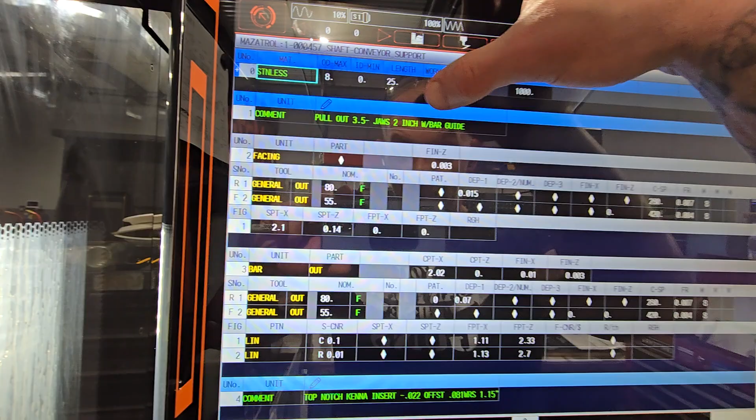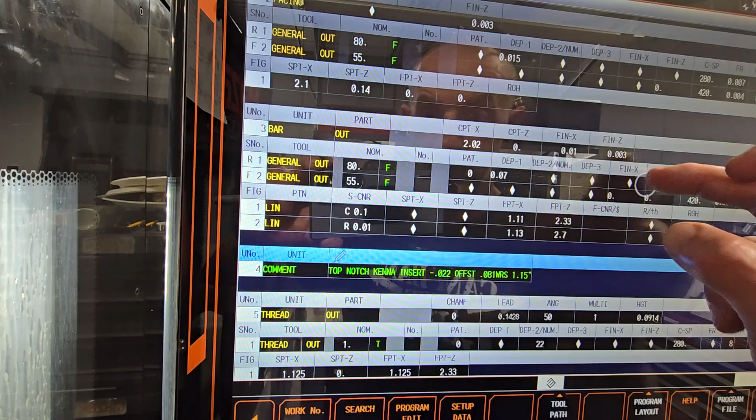So as with notes, pull out 3.5 inches from jaws, 2 inch with the bar guide inside. My tools are 80 and 55 respectively. So over here I'm starting 2 inches, 100,000, removing 140,000 from a face. I'm coming down to 0 and my Z is 0. OD turning, so the OD turning I'm only doing...

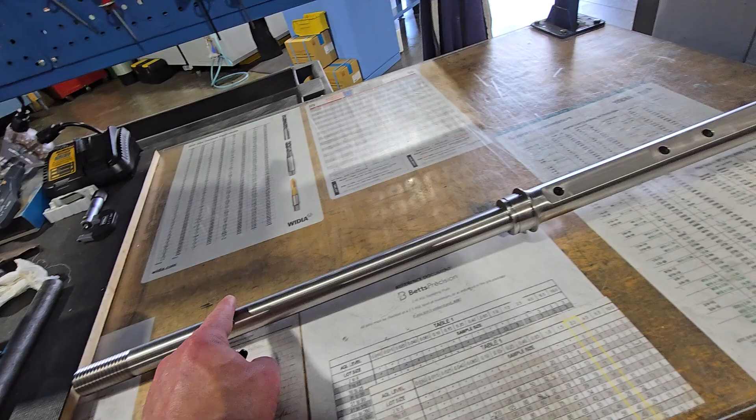Let me see, this section right here, which is the thread, and a little bit past the thread, is because this part does not allow center. And as you see later, I'm only doing this here, and then I knock this out up to here without support. All I'm using is a center and this, like a, let me see, I'll show you.

I make this like a flat button. So what I do is I press it on the face of the part and I bring the tailstock into here. And if you set up your speeds and feeds, you should be able to cut it without chatter pretty far.

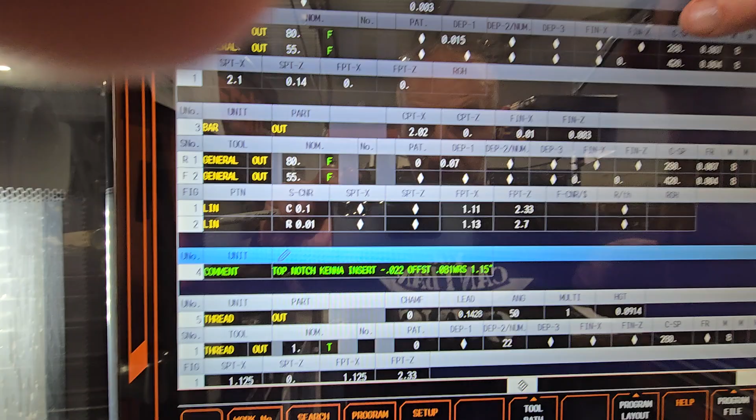What I do is I break it into sections. So I do half and half. What I mean by that is, I machine this first, then I hold the part here, and I machine here, finish it, and then I blend in this section. So at least it's got some extra material, so it gives it a little bit more rigidity.

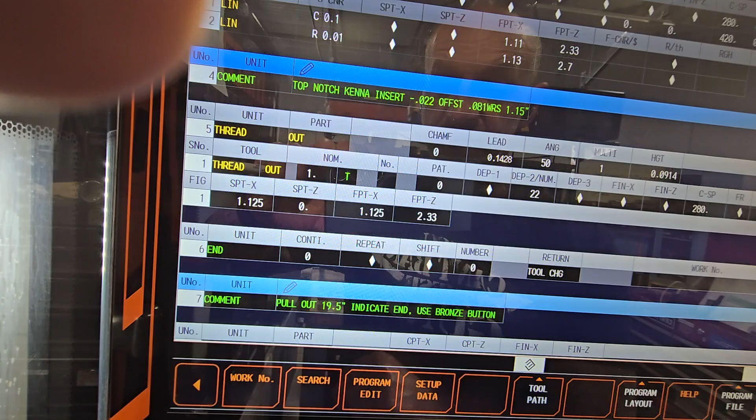So OD turning up to like 2.7 inches, and then I do number 7 thread. If you don't know, number 7 thread, the lead is 1 divided by 7. That's going to give you 142 and 8.

Angle, it's 50,000. It's not actually angle of the thread, but the entrance. One entrance, 91 and 4 height. That's all automatically populated. And this is a 1 inch and 1/8 thread.

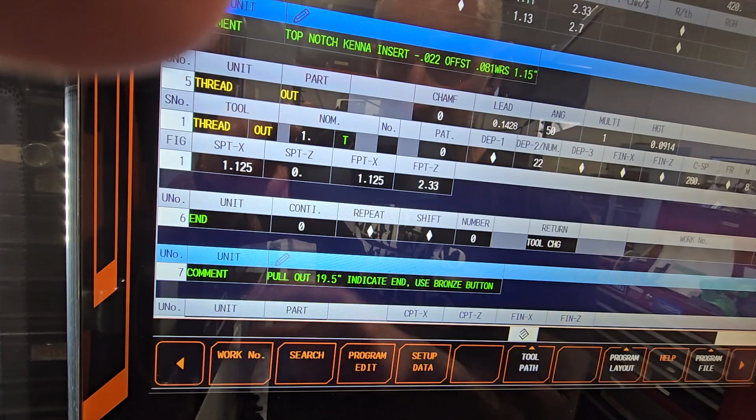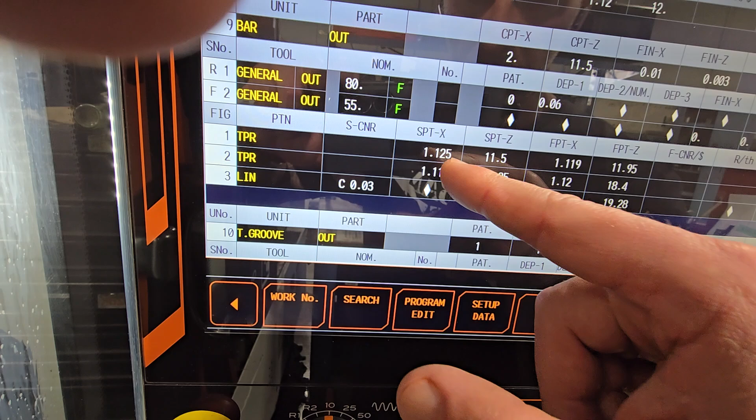And now, as you see, I have 2 bars. I'm starting one at 2.02 all the way to 12 inches, and then I'm starting 11.5 all the way to 19 inches. So I do start half an inch early, and then it starts up in the air, so 1 inch and 125, and then it goes to 1 inch and 119 at 50,000 before I finish the other part. So you have this nice transition, and you don't see a step.

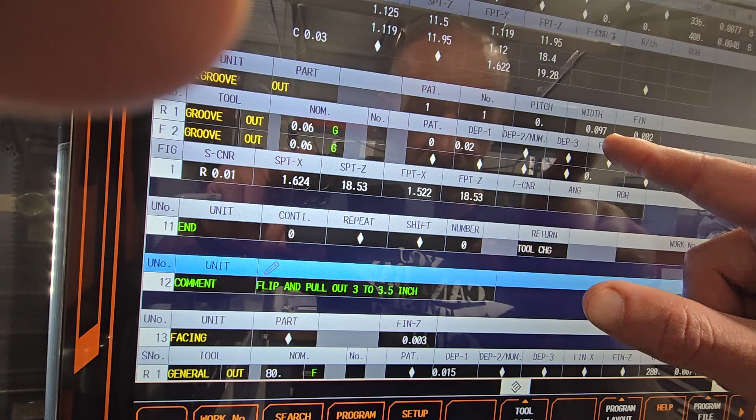Then I have that groove out. So groove, this is pattern 1, so it's a regular. That means you set your Z as the beginning of the groove. You add width of the groove. The finish for that I had set as 0.002. And starting Z and final point Z are the same because it's just a regular groove.

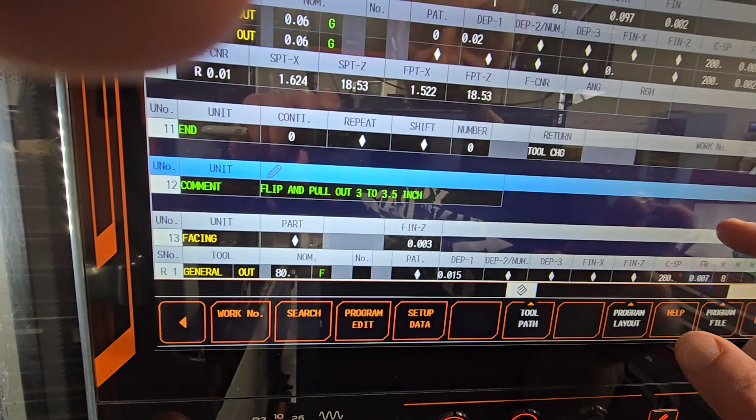Now flip and pull out 3.5. So I'm facing to size. I got a little section, as you see over here. I'm machining this section.

So this got a thread, so it's just one diameter that's going 160. I'm using half an inch spot face as a center for a drill. I'm drilling the 550 drill, which is 14 millimeters.

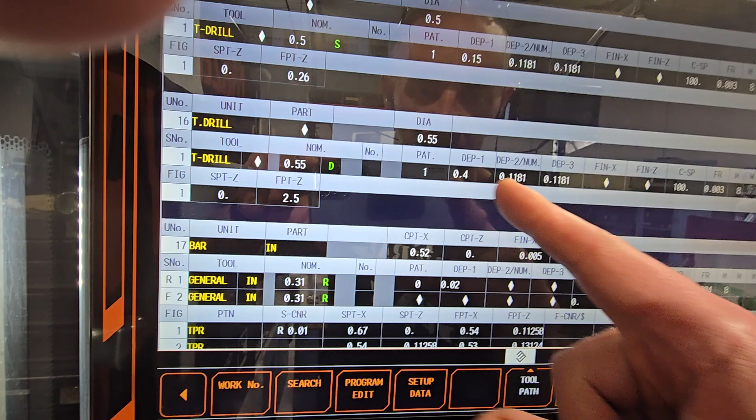Pecking, that's technically all automatically populated. It looks good, so I didn't mess with it, and I'm going 2.5 inches deep. Now I'm using a 5/16 bar because instead of a regular chamfer like 60 degrees or 45, I'm actually doing a chamfer 30 degrees where the thread is gonna be.

And I'm talking about here. Why? Because I'm gonna use this as a center, so I'm gonna support the part. So if the center is 30 degrees and the chamfer is 30 degrees, it's gonna sit nice and flush and it's not gonna damage the beginning of the threads.

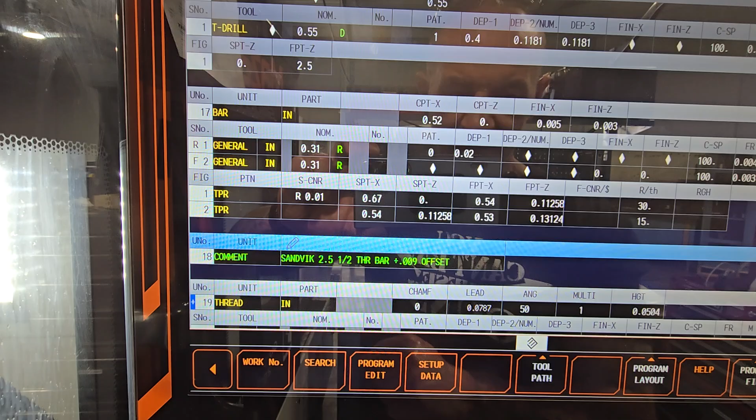So I'm throwing the chamfer there, which is 0.112 chamfer. And then I do two separate cycles for the thread. As you see, first one is 16 passes, and then I repeat 6 passes just to clean it up. Technically that's it. Now I flip the part.

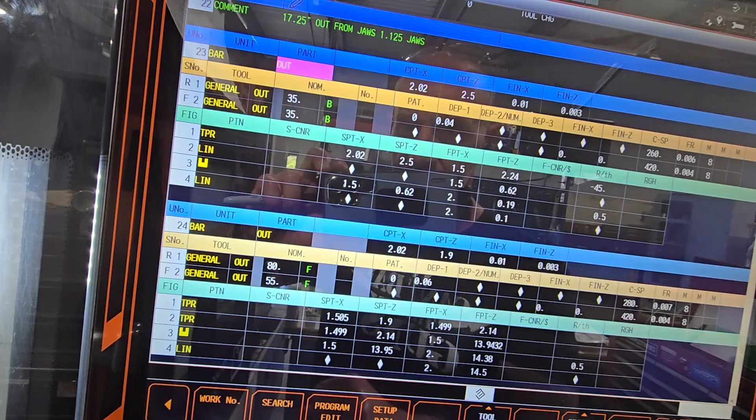Okay, I'm gonna hold it here, and I'm machining all this radius here, and then the flaps. So it's running right now.

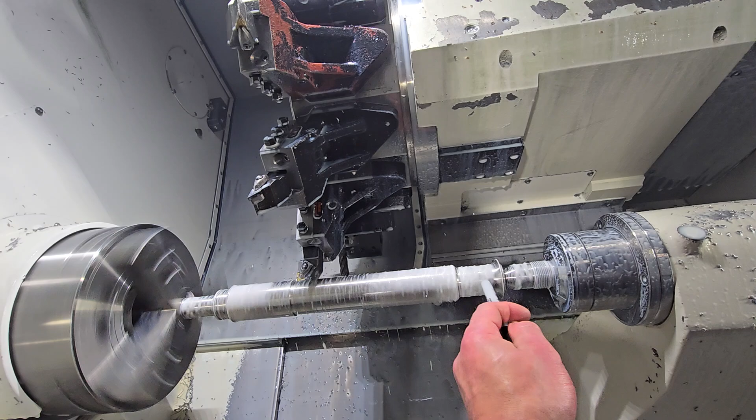As you see, first I back turn to give me a little room, and then I just come down with an 80-degree tool and just run it all the way through. So as you see, I got a bar out, highlighted. Highlighted means there's material that it's gonna cut into, and I use a

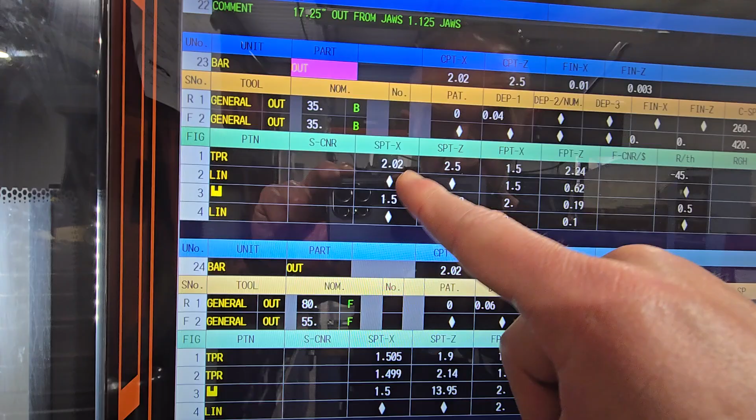35-degree tool, and I'm going from all the way at the top down to 45 degrees. 45 degrees down to that 1.5 diameter, and then I come in and technically blend in later with this 80 and go all the way across. Now, line left.

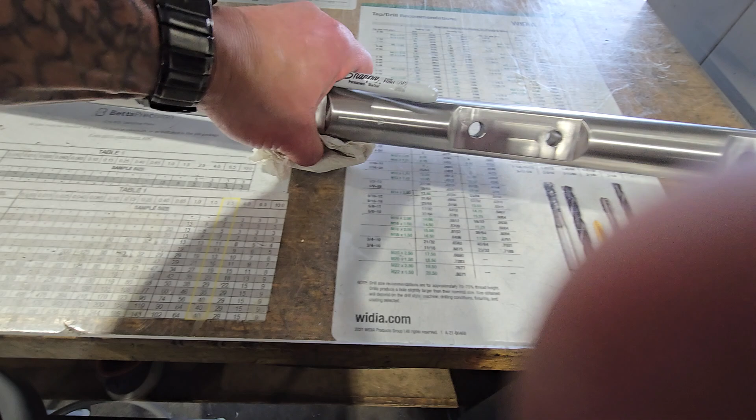So let's talk about the first line left, okay, which is this one. So see that sharp corner? The sharp corner is going to be my start, and the sharp corner on this side is going to be my finish. Now, if it's not going to stop rotating, let me put something underneath. Okay, there we go.

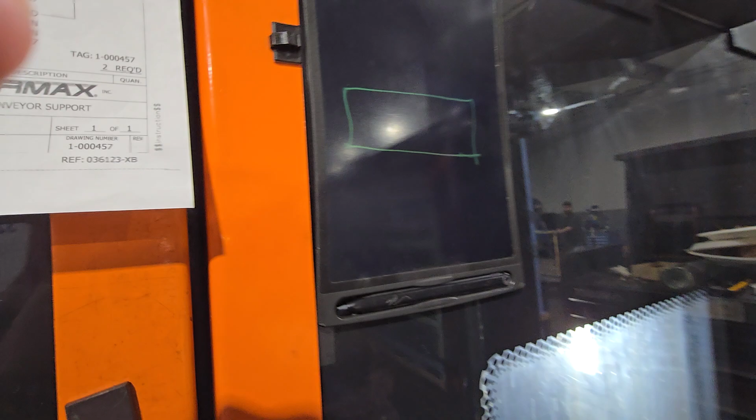Now, the way that's going to be done: I used to do a closed kind of loop, right? When I used to program, I used to climb on a Y, go across, come down on a Y, and then come back to the front. Well, when I talked to one of my friends, and he's a mill guy technically, I kind of did it in reverse, because of line left.

So if you look at the part from here, you're supposed to actually go from the top. So let's call it like this. You're supposed to go from the top on your right hand side. You go to the left, then you go on the bottom, and then you come up. Instead of actually coming down, going on top, and then coming down this way. So let me see.

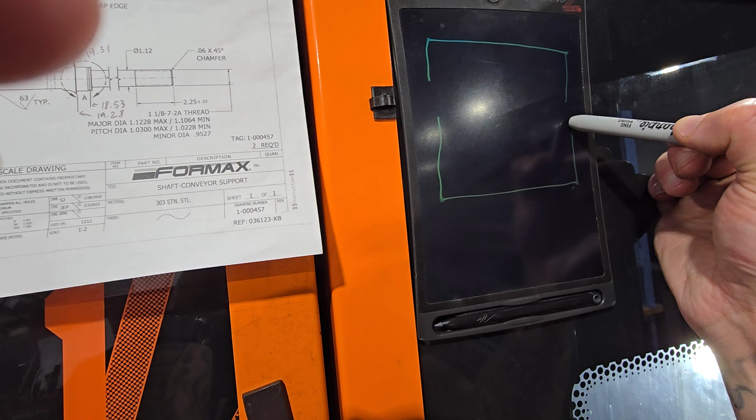Kind of messed up. So we start on this side, go on a Y, go across here and here. And like I said, before I used to go from the bottom to the top, across, down, and then I'd come back, right?

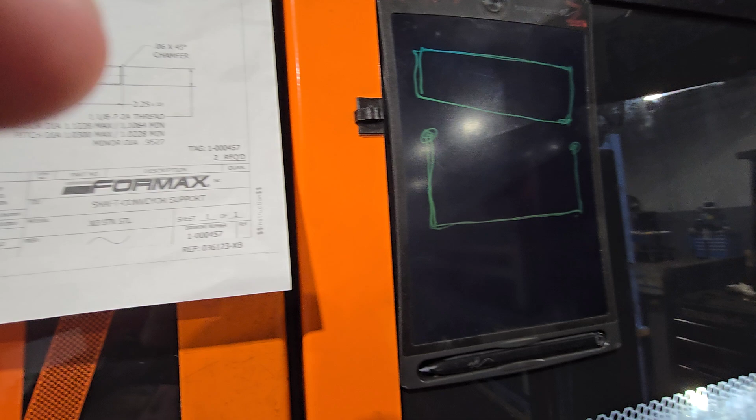Now, the problem with this is sometimes I had alarms, and it was just kind of a pain in the butt to do that. So when I talked to one of my friends: technically what the machine used to do, it would come up, go here, here, and then come here. And if there's extra material, it would just kind of do this, right?

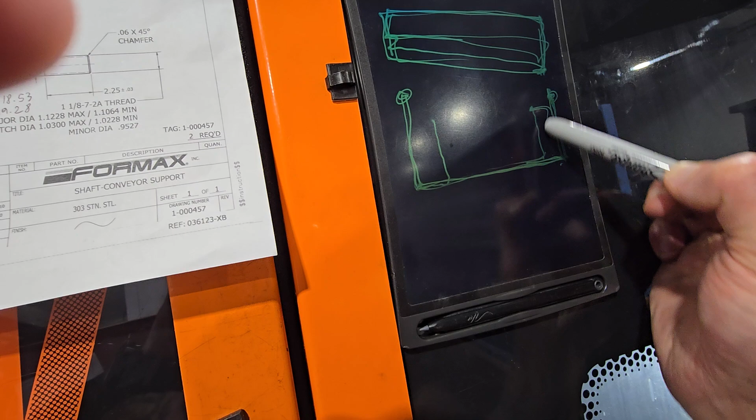Now, if you program it as a U and don't close it, what the machine does, it actually starts here, comes across, like here, then comes back, then comes down here, and finishes this section off, then comes across and goes up and finishes this section off. So it only actually machines this way.

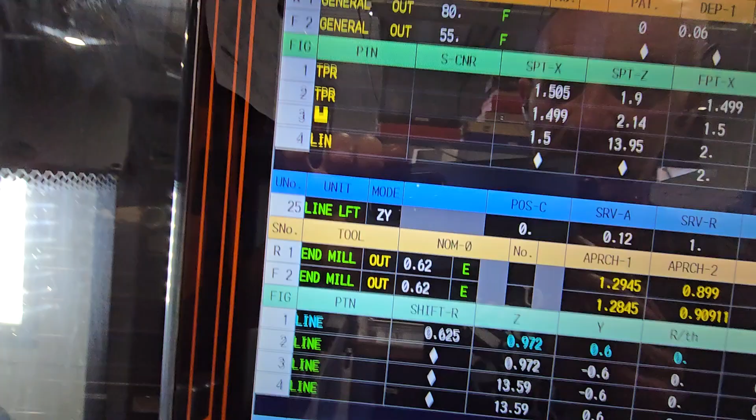And you can actually take a way bigger cut, because this is what they call climb milling, which is what you're supposed to use in CNC, because we have servo motors, versus on a Bridgeport manual, where you're supposed to do standard milling. So this actually works out much better, a way faster process. There's just less wasted time. So let's get back to how the program is written.

So, okay, we have a line left, we have a Z and Y, right? Because we're traveling across on a Z, and then we're moving on a Y, and the C does not technically move. It only stays on a position C that we set it onto. So position C, we are removing .120.

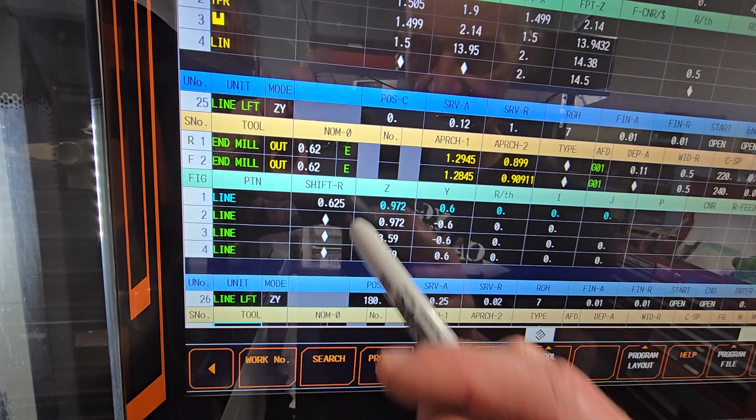Okay, so your finish point is from the center, not on the diameter. Remember that center is .625. If this were rounded, that means we got a 1.25 inch diameter. So from the center it's .625. That's the bottom of the part, and we are removing .120. So the machine's gonna come that .120 higher, and it's gonna drop down to whatever depth of cut we set this to.

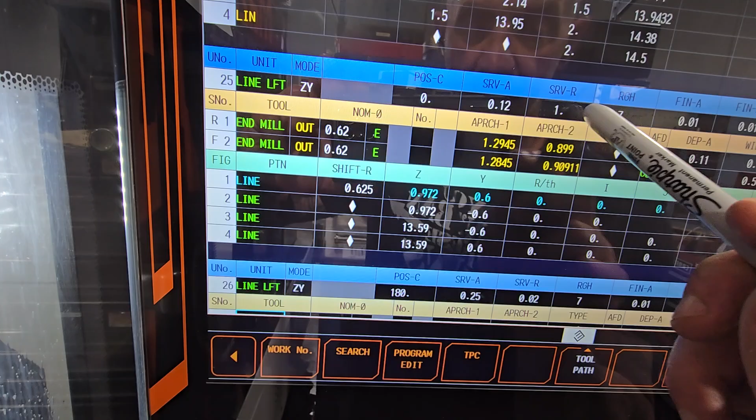And we are removing 1 inch from SRVR, which is from diameter. And what I mean by that, let's call this one. We're telling her that this flat is 1 inch, but the depth of the flat is 120 thousandths. So what happens, let's say if you tell the machine you got 800 thousandths on R, you might have a step over here, right? Because it's gonna come down and it's gonna go across, and it's gonna leave that because that's 800 instead of 1 inch. So that's what the SRVR is.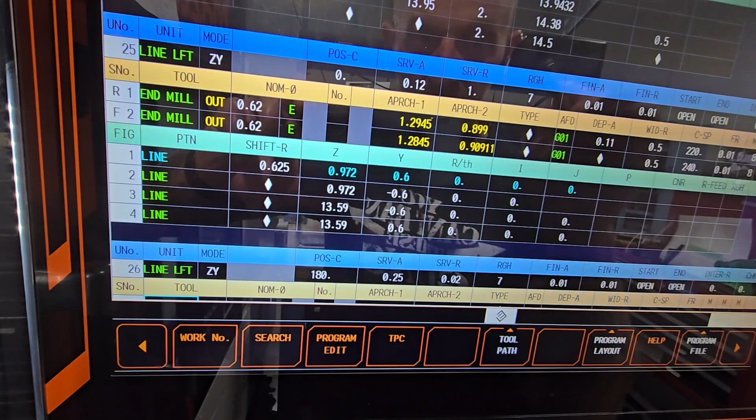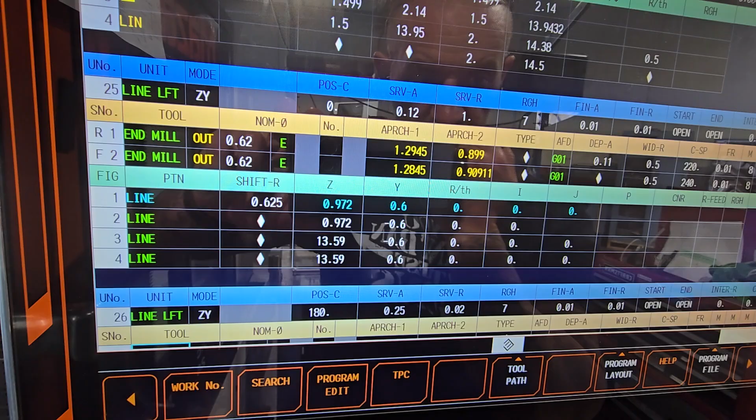And then your rougher and finish, and how much you wanna finish on A and R. So I just put it 10 thou. My start and end is open. There's no interference and no chamfer. So here are my end mills. I'm using 5/8, so 625. Approaches are set automatically. I'm doing 110 thou cut, so it's gonna do one roughing pass and then one finish pass. The width of the cut is a half an inch; I set it on a 5/8 end mill. My surface speeds are 220 and 240 with 10 thou feed rate on rougher and finish.

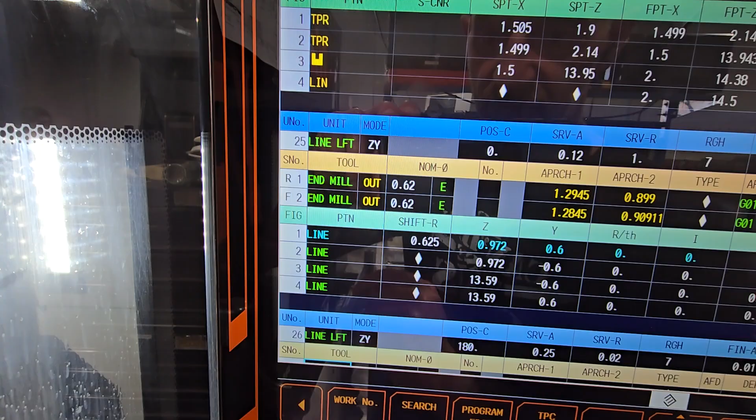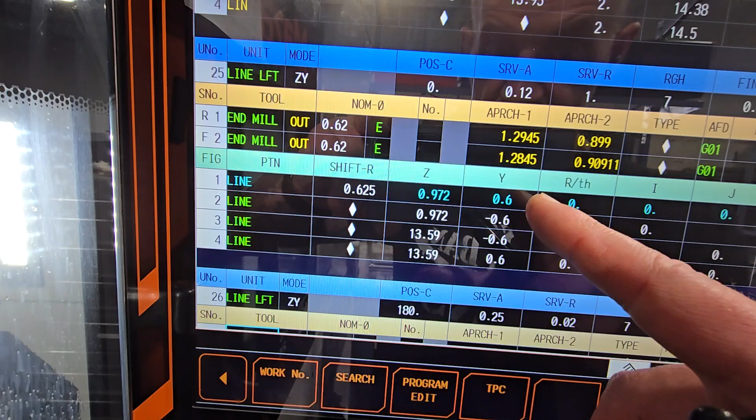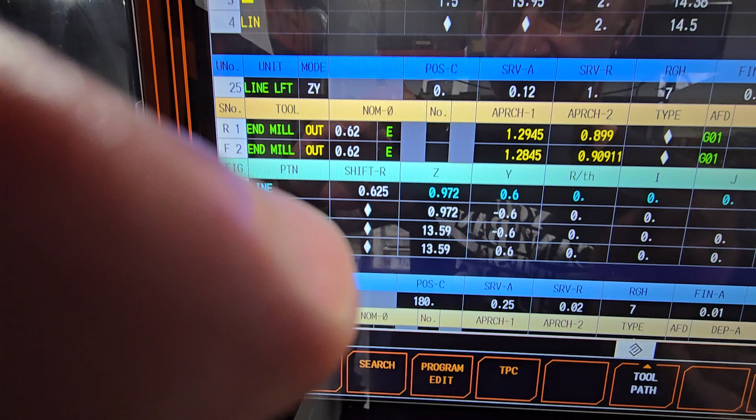So now, the first line, we're telling her that the bottom of that flat is going to be 625. Now, my starting Z position is going to be 972. So 972 is going to be that corner. And then we are 600 thou on a Y. So we got that 972. This is starting, and this is 600 and minus 600 on the bottom. So 972 on Z, 600 on a Y. We are staying on the same Z position, but we are going down on that 600 on the Y, right? So we're going 600, telling her go down, same Z position below, so on a -6. So it's got a 1.2 inch swing from the top to the bottom on the Y axis.

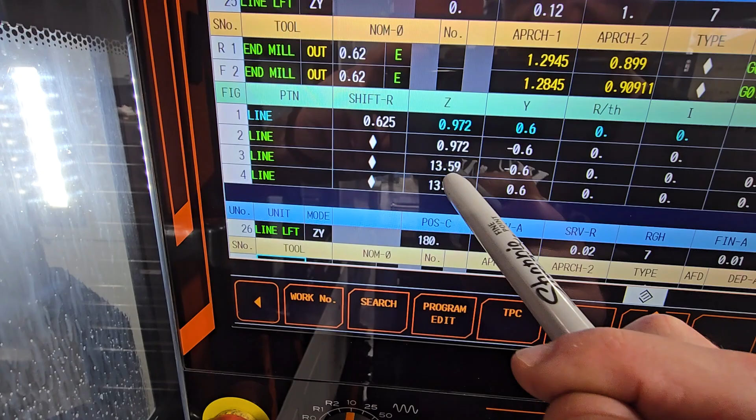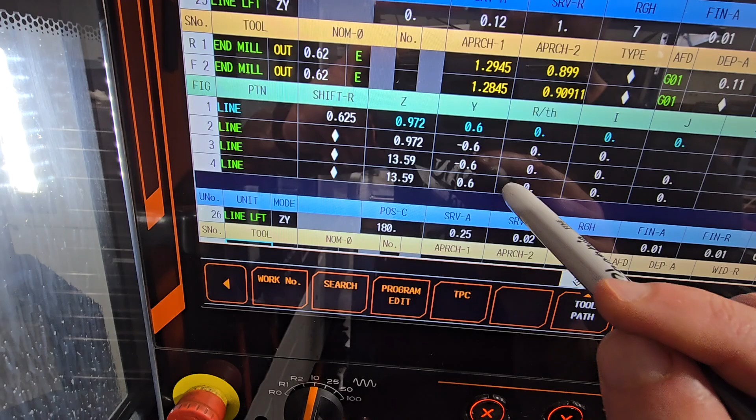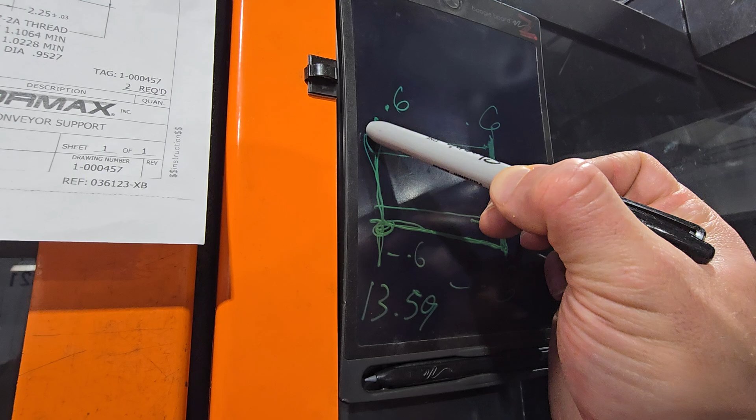Now, this is going to be the second one, right? And then on that 6Y, we're telling her move from 972 to 13.59. So now we're going all the way here till we hit 13.59. Okay, so now we're here, as you see, and now we're staying on a Z position, 13.59, but we are going up on the Y to 600. So now we're going back to 0.600. This is minus and this is minus. So as you see, we're going from 600 on that 972, down. We're going across and we're going up. And when you do that, the machine technically comes down here, does the pass, retracts, comes back here, does the second pass, and then it comes back and it finishes everything up. So this is that long flat.

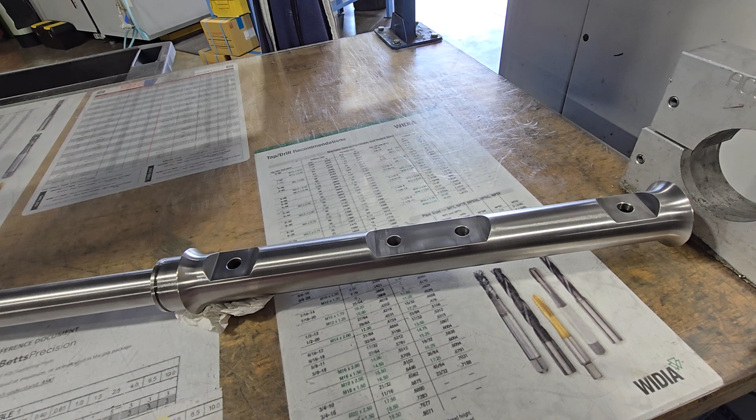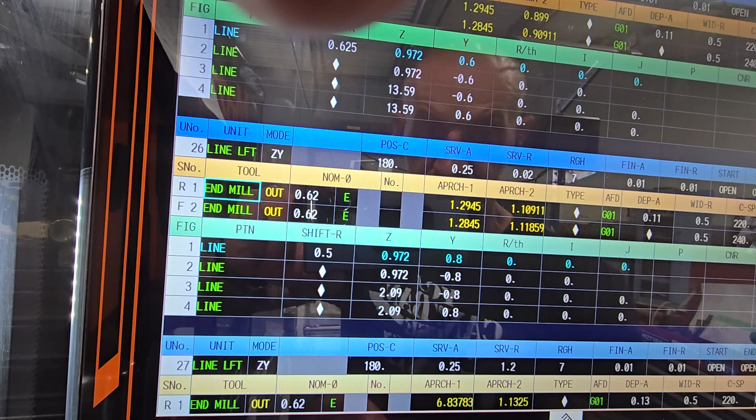Now this part also has 3 more flats, but these flats are 1/4 inch deep, and as you see, this one is much bigger. It's much longer than this one. So this is where I got that little edge where it didn't clean up the top, and I'll show you why. Same thing: line left, you can technically copy everything. You adjust your position to 180 because it's a cross. We are removing this time 250,000. And my shift R is going to be 1/2 inch from the center. So if it were uniform, you would technically have 1 inch on the diameter, right? So this time shift R is 0.5, and we're removing 125,000. I changed the SRVR to 20,000. This actually doesn't matter. It made no difference to me.

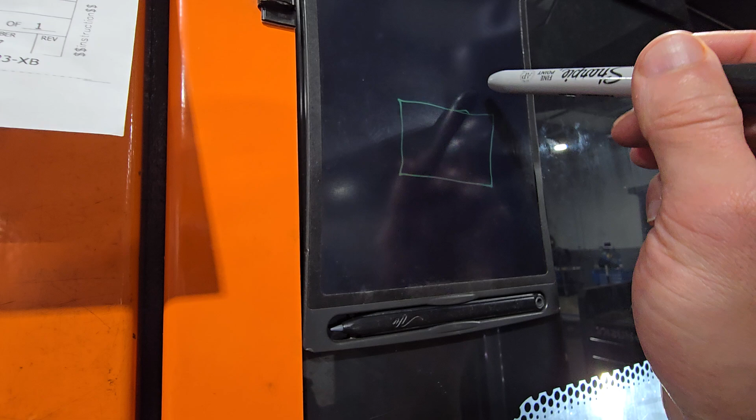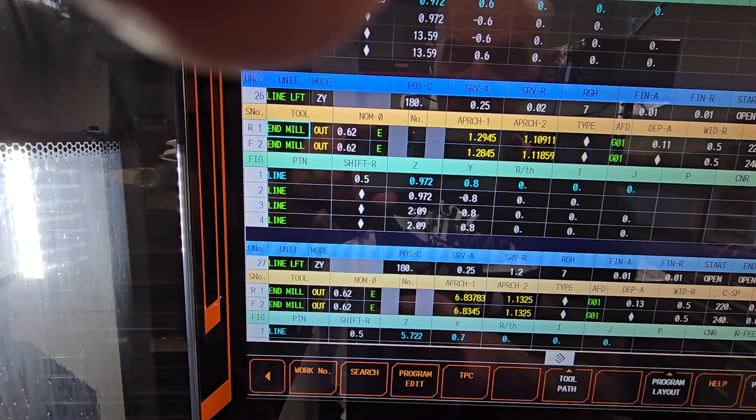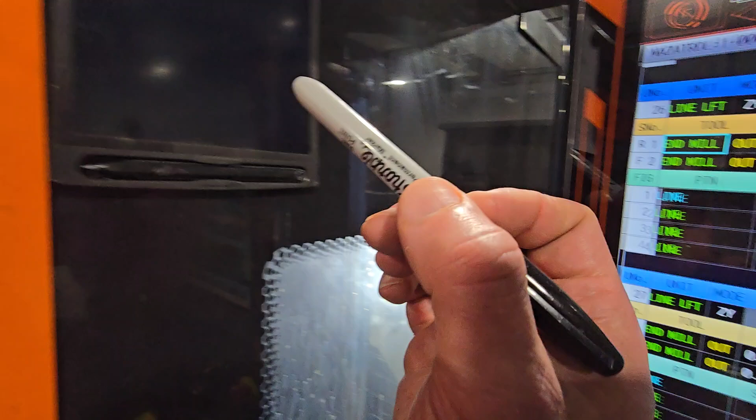And the reason why is because on the smaller ones, the end mill is so big that no matter what it does, it cleans everything up, right? Because the end mill is technically this. So no matter what it did, it cleaned it up. Now, this was the smaller one. As you see, it goes from 972 to 2 inches. So it's a little bit over 1 inch, not much, and a 5/8 end mill. No matter how you break it down, everything will clean up. However, that middle one, this one right here, is much wider. And what happened was when I ran it, like I said, it left that. It cleaned everything here, right? But it left a little lip on top.

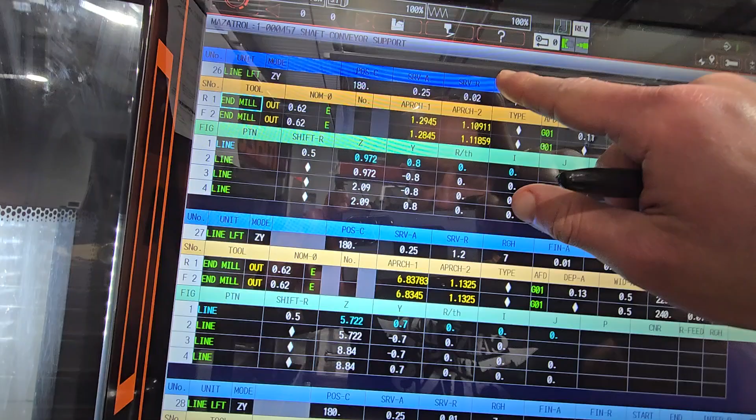So what happens is because now you have way more coverage to pay, and because you go deeper, you also have much more SRVR to remove. The reason why this one didn't matter is because it's 5/8, so technically no matter how you run it, everything would clean up. But if you use a 1/2 inch or 3/8, it would not clean up.

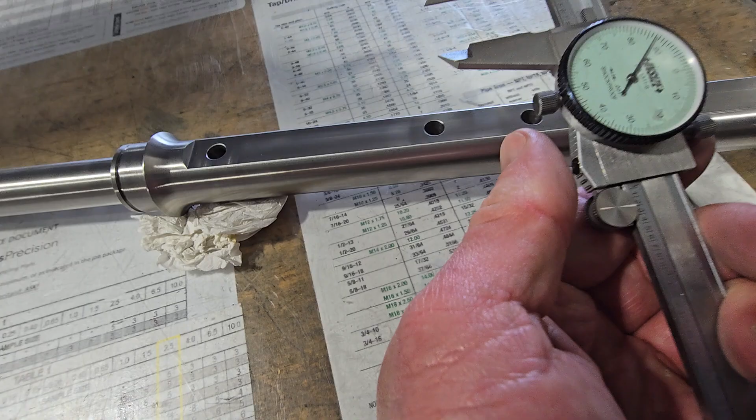You would actually have to measure that SRVR between here and here. And at the bottom, because it's more shallow, the diameter was much smaller, right? Let me grab this to kind of show you what I mean. So this flat is 800,000. But since this one goes deeper, as you see, this one is 1 inch and 180,000. Okay, so that's why it didn't clean up.

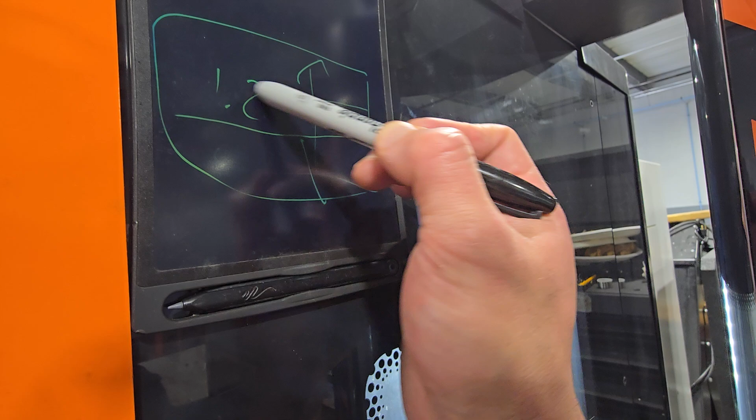So all I did was I added that SRV-R 1.2, and then it did an additional pass. Because now the machine knows that this diameter is 1.2, but we set the cutting tool as a 5 inch. So it knows that 5 inch will be here, 5 inch will be here. So it's missing an additional 200,000. That's that extra pass, and then it cleans everything out.

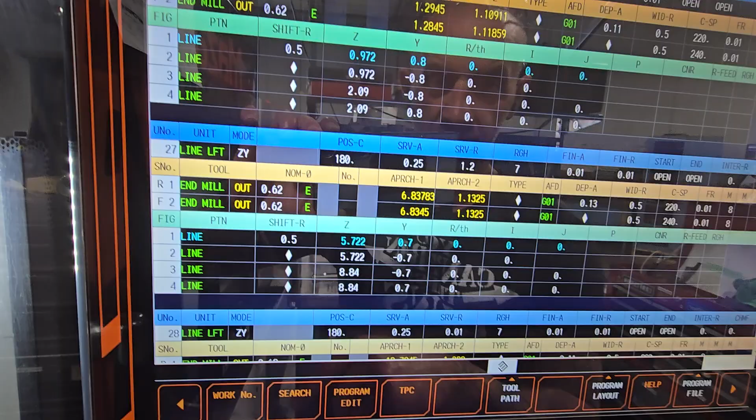So like I said, in some instances, it doesn't matter what you put here. But if the surface you're covering is much bigger than your end mill, then you have to be a little more specific over here, so the machine knows that you just have more cleanup. Now, if you have a question mark, as you see, the finish A and your finish R. Your finish R is technically the width, from here to here, and finish A and SRVA is technically your depth.

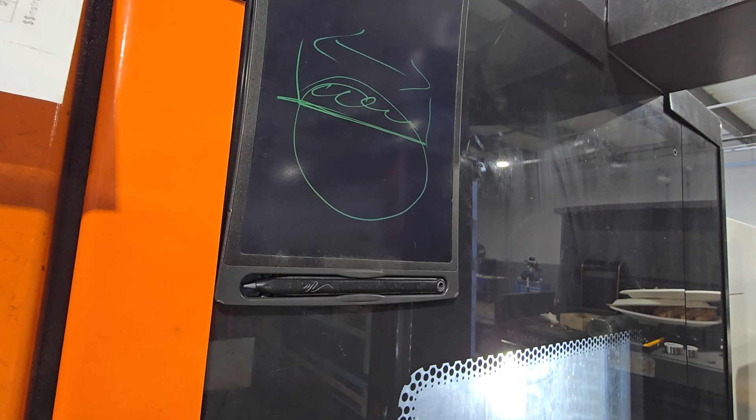Now, it's hard to say. For example, if you got a bar, right, and you need to get rid of this, well, how much is from here to here? So I kind of had to eyeball it. In all honesty, I'm not that good in math. You could probably calculate that, you could probably figure it out. But for me, I just eyeballed it. I went originally 1 inch, and I saw it left it, so I added 200,000 to it, and it cleaned up.

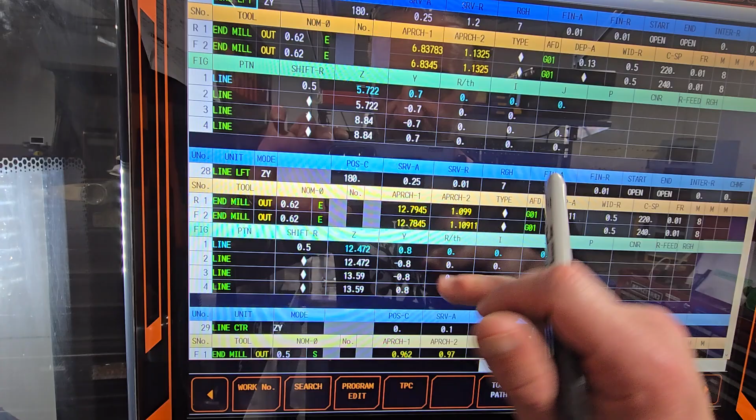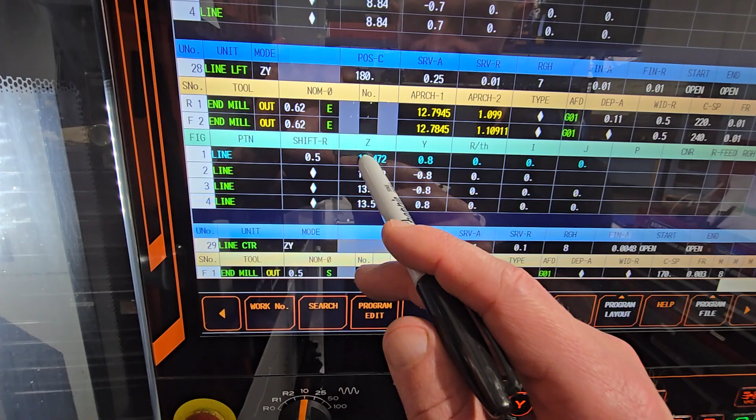So once I had this program, I had 3 more. I made the first one, I copied the second one, I copied. All I did was I changed the approaches, did a question mark to approach, and I kept this because everything stayed the same. The only thing that I changed was the starting Z and my finishing Z points. Everything technically stayed the same.

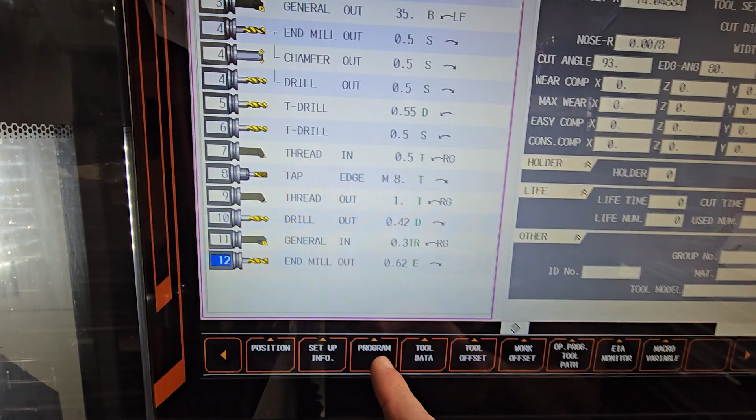Now, line center. Okay, so I have a chamfer drill, and I use it as an end mill, and it says 0.5S. Then I got a chamfer out and drill out. So I got one tool that's doing 3 different jobs. So line center does a single pass for chamfer.

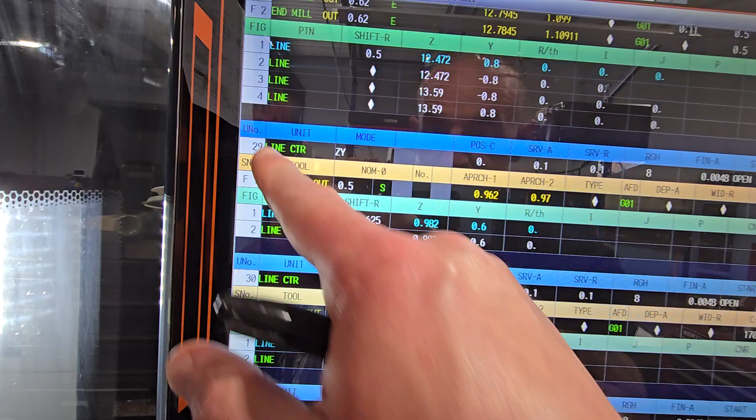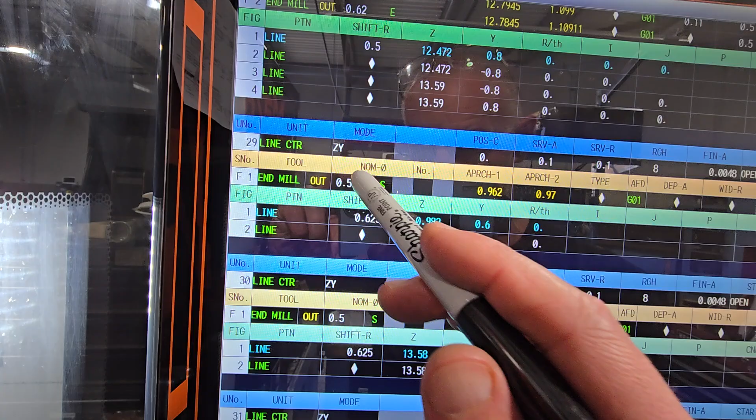So same thing, you see line center Z and Y, position C 0, SRVA 0.1. It doesn't really matter because I'm only doing 1 pass as a finish. I'm not doing any roughing. So all these things are technically valueless to me. So I set it as an end mill, but I called it 0.5 S, so spot face, or you can throw in a chamfer. Automatically populated approaches. My speeds and feeds are 170 to 3000.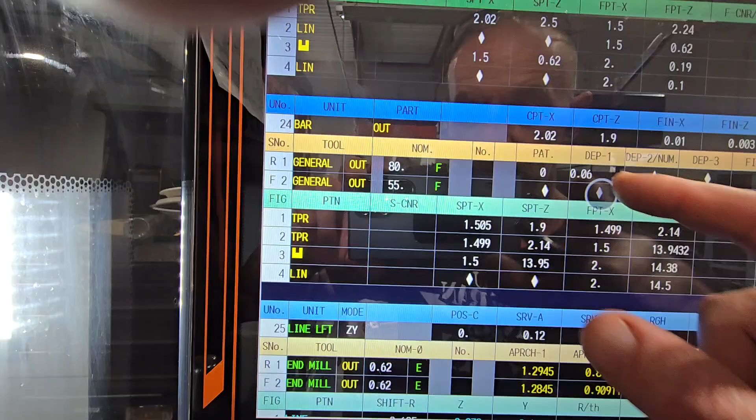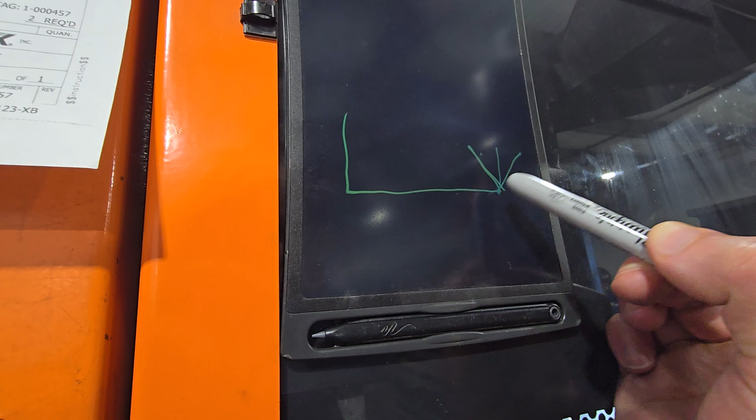And all I do is I set that 625 from the center, 982. The reason why it's 982 is because these spot faces have about 10,000 to 20,000 flat on the bottom. So as you see, 972, and this is 982. So what I was told, if I have a flat and you run the chamfer drill, you're gonna run this drill like this, and then it's going to come down on this side.

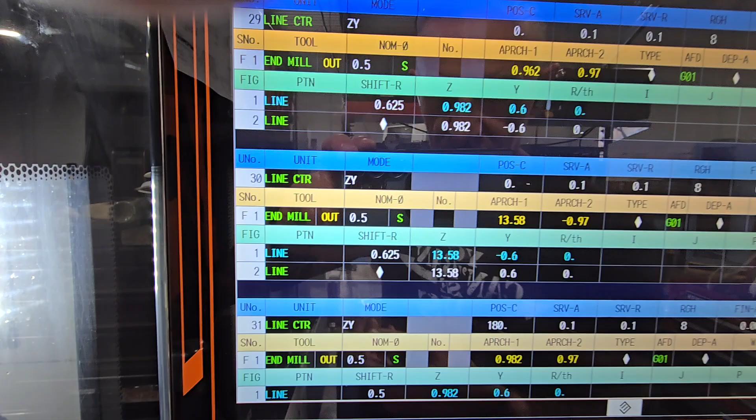Bring here and here about 10,000 on each side. Okay, so when this was supposed to be at 972, I went to 982. As this was supposed to be 1359, I brought it back in to get it tighter, right, to 1358. So remember, the end you bring it to the inside, and the beginning you bring it to the inside as well. So get them a little bit closer, and what that kind of gave you, nice, beautiful, clean corners.

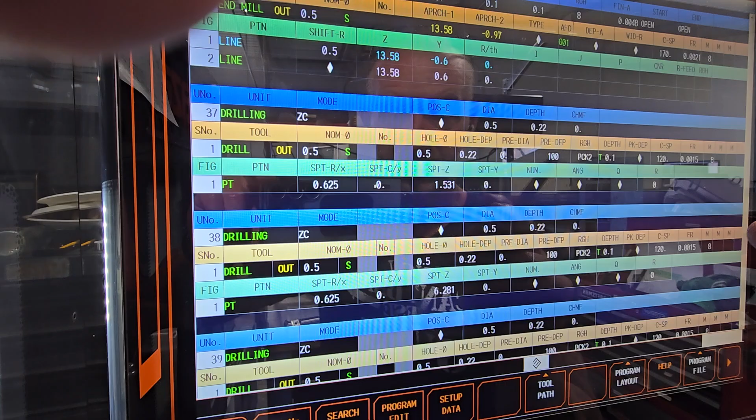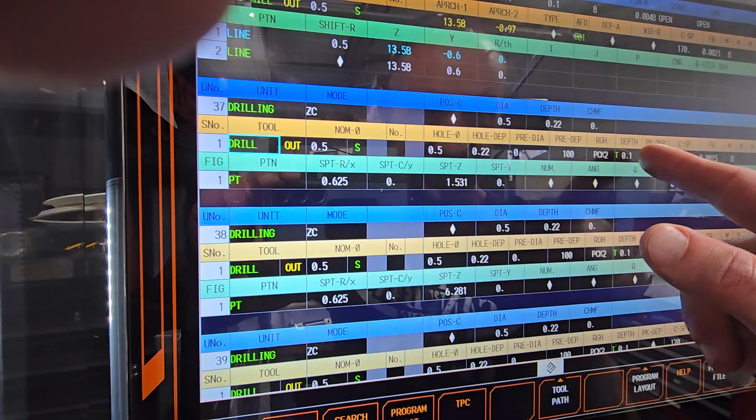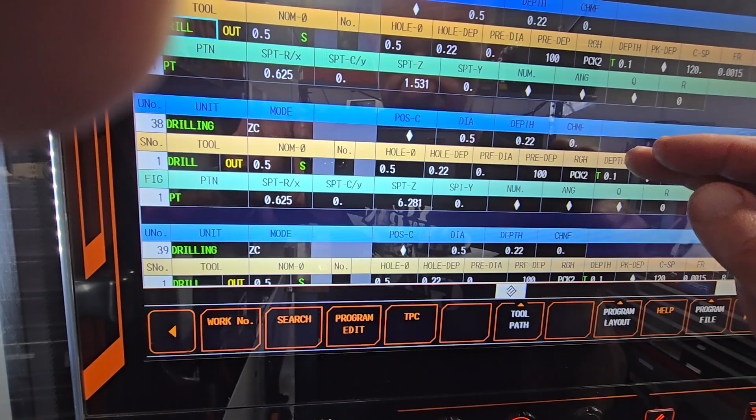So as you see, this one's got a center, but these are a little bit to the side, and then this is also in the center of the smaller flats. So I'm getting my chamfers everywhere, and I'm getting chamfers on both sides. So once the drill goes through, I also have a chamfer on the other side. So as you see, chamfer here and chamfer here. This is 125 and this is a 1/4 inch thickness.

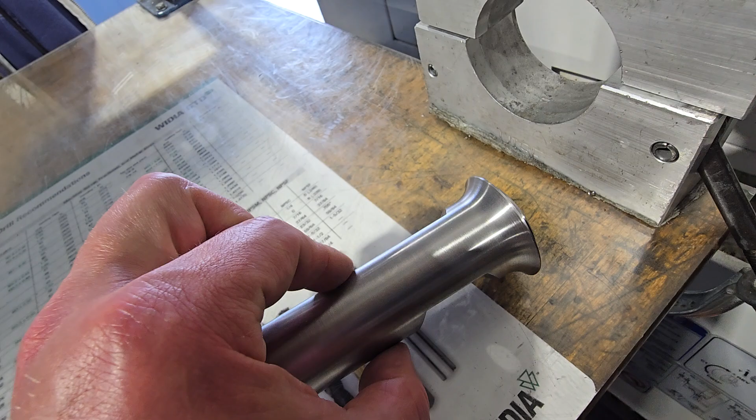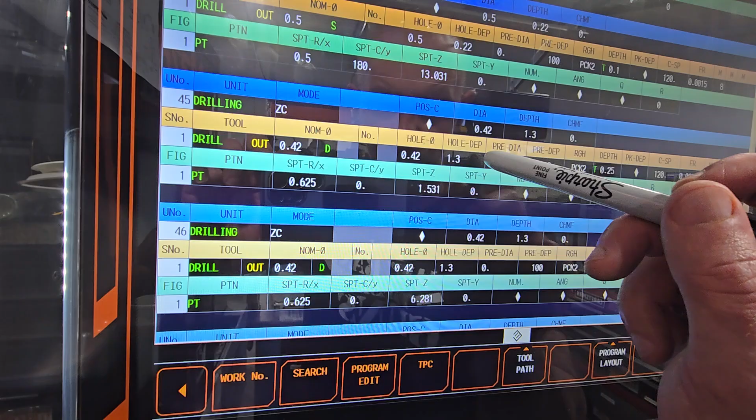All right. And so over here, now we're technically at a drill. So same thing as drilling, sorry. 420 diameter, we're going 1.3 inches deep. 420 drill, 420 hole diameter, 1.3 deep. So these are technically being brought from the top to that middle line. And then we do pecking number 2, a 1/4 inch pecking, 120 surface speed, 0.003.

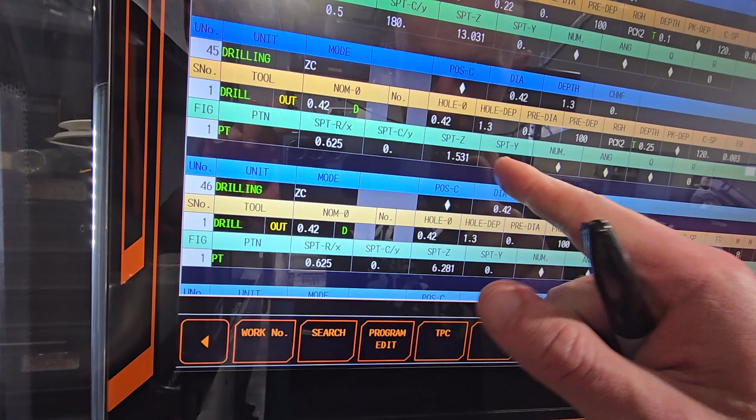And now we're doing point because it's 625. It's going to be that starting diameter. And my center is going to be 1.531 and 0 on the Y. Same thing as 625, 625, 625. So I'm only drilling technically from that more shallow side. So right here, right here, right here, and right here. So 4 drills and 4 holes.

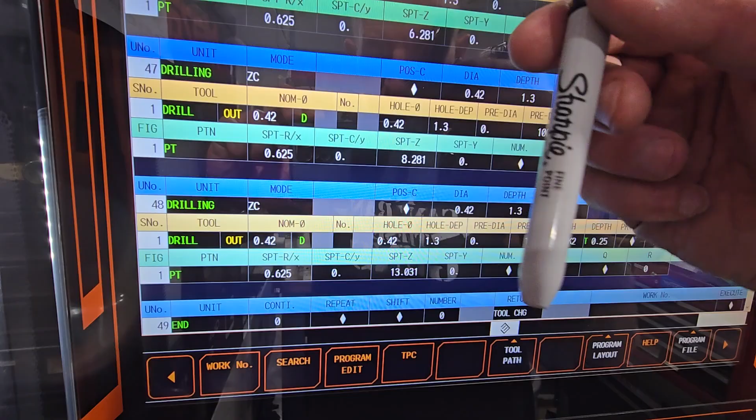If you want to be specific, if you got a large diameter part, you can drill from the top, rotate the part, and then drill across again. So technically, this is the program now. So just remember, like I said, if you're gonna program, you're gonna look at the part. Let's see the part. Hold on.

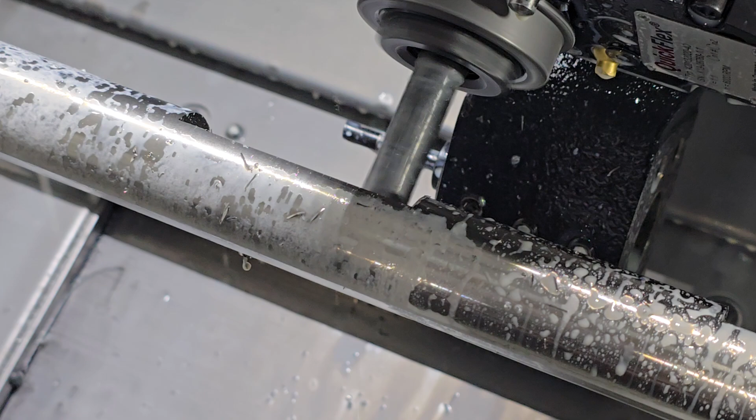So as you see, the bottom flat is already done. This is running a finish. So see, it went down, and on the left side it goes up. Now it's running a finish.

Okay, so it ran the rougher 3 times. The last cut of the rougher, I just noticed, it's not big enough. So what I'm gonna do is increase the depth of the rougher so it only does 2 passes instead of 3. So that's gonna save time. So now we got the chamfer going.

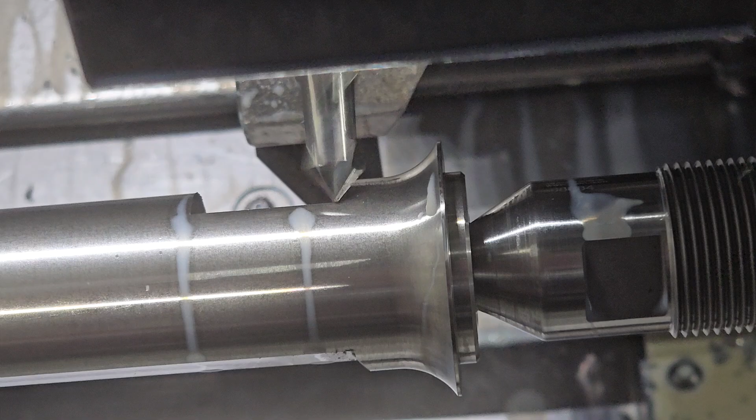It's funny how that chamfer mill looks like it's rotating very slowly, but it's actually rotating super fast. It's just the frames are not catching all the rotations. Okay. And now we're going from the bottom. Let's see if I can get a better shot.